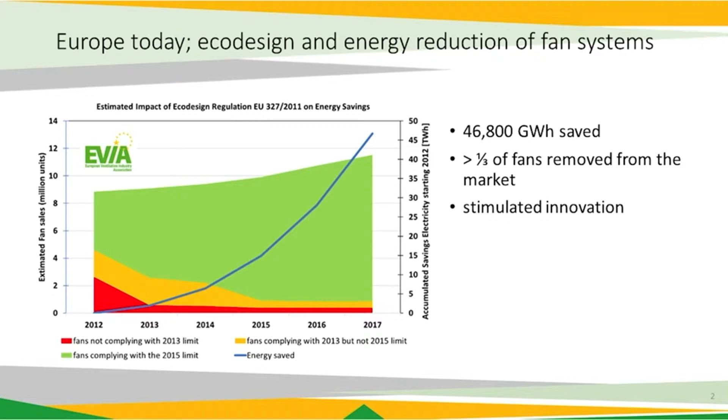Today we have an eco-design regulation in Europe that's very effective. It was published in 2011 and sets minimum energy efficiency requirements for fans between 125 watts and 500 kilowatts. It set a minimum limit in 2013 and 2015, which removed about a third of the least efficient fans from the market. It stimulated innovation, and we estimate 46,800 gigawatt hours of energy has been saved between 2012 and 2017.

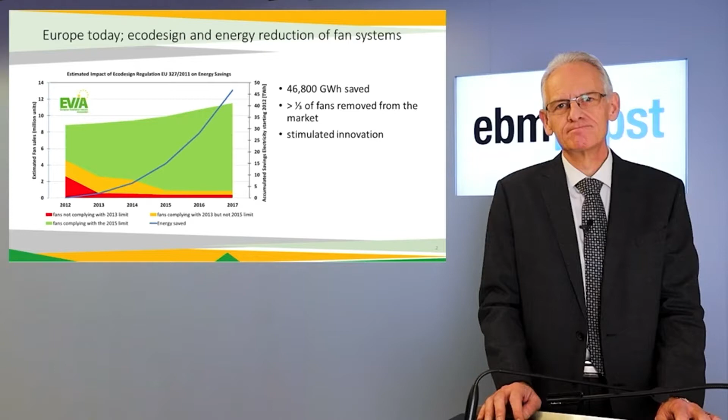So what's the problem? There's pressure for change from a variety of stakeholders. First, the consultant acting on behalf of the European Commission, during his review of the existing regulation, was critical that we haven't developed the underlying metric of that regulation. And it's a fair criticism. Then we see in IEC standards, they ask the fan industry through ISO TC 117 to develop an energy efficiency metric.

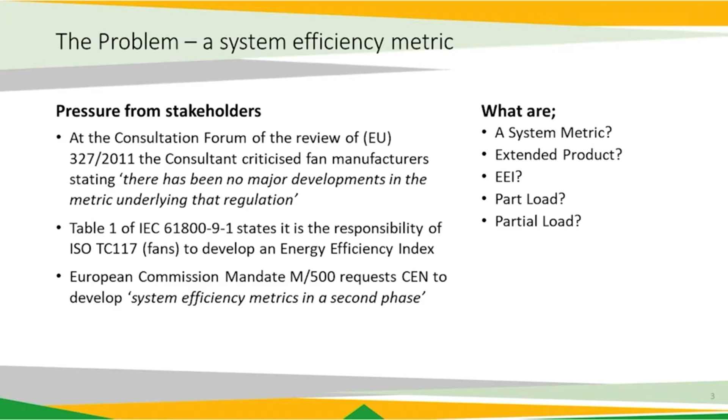We don't think an energy efficiency index is appropriate. Then we have a request from the European Commission through a mandate for standardization. The first phase is complete, and a standard to support the regulation should be published shortly. The second phase asks for a system efficiency metric. The problem is we're not sure what that is.

There's not a clear definition. We see it gets mixed up with the term extended product. We see there's a request for an energy efficiency index, and that talks about part load, but we can't find a definition of part load or partial load.

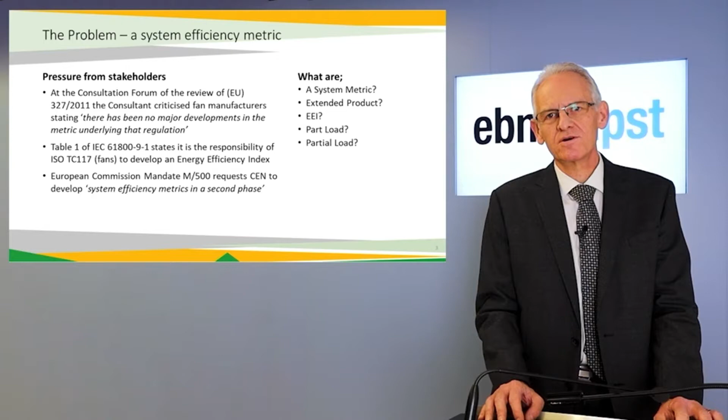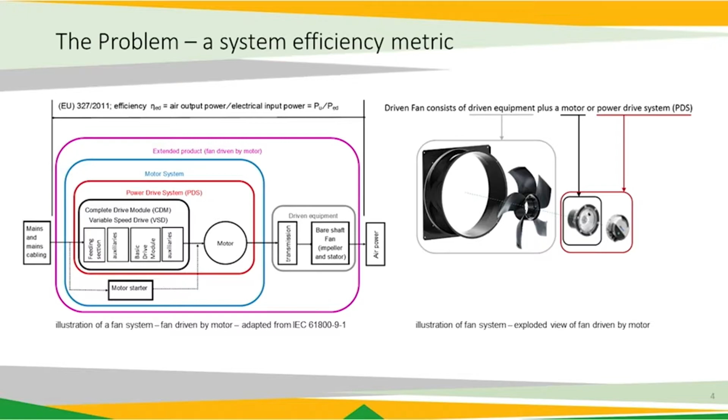What we do know is that the existing regulation is for a system—a fan system. It looks at the electrical power input and the air power output, and the system consists of the driven equipment, impeller and stator, and of the drive, the electric motor, and the variable speed drive.

Let's look at the term extended product. That is clearly defined as driven equipment together with its connected motor system. A fan system is an extended product, and we call it a driven fan, consisting of an impeller, a stator and a motor, and we're clear on that.

IEC 119, I believe, confuses slightly the term system approach and extended product approach. For me, it's clear a system approach within that standard describes a cascading effect from the product through to a larger product, through to the final system. Let's take the example of the fan.

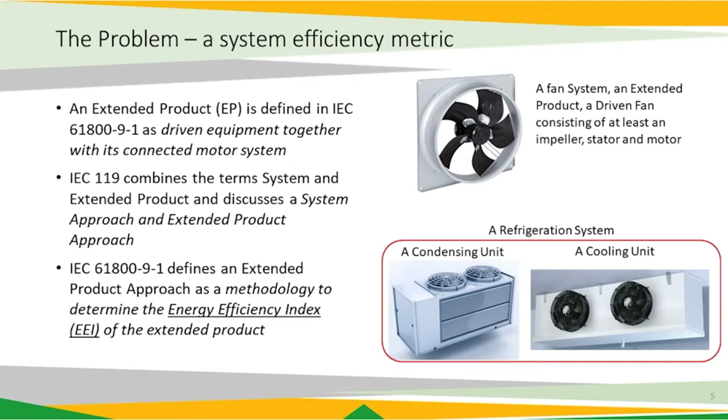We have the fan system consisting of a stator, impeller and motor, and that can be used in a number of different other systems. For example, a condensing unit, which consists of a fan, a coil and a compressor. Or it could be used in a cooling unit, consisting of fans, coils and expansion valves. Those two systems can come together into yet another system, a refrigeration system. So we have this cascade from what I would see as a component through to the final system. And of course, that system goes into other systems, for example, the supermarket.

What I don't understand is why the IEC standard says that the extended product, which is mixed up as a system, has to be an energy efficiency index. It doesn't fit for us, and I can't see it fitting for other systems through the cascade.

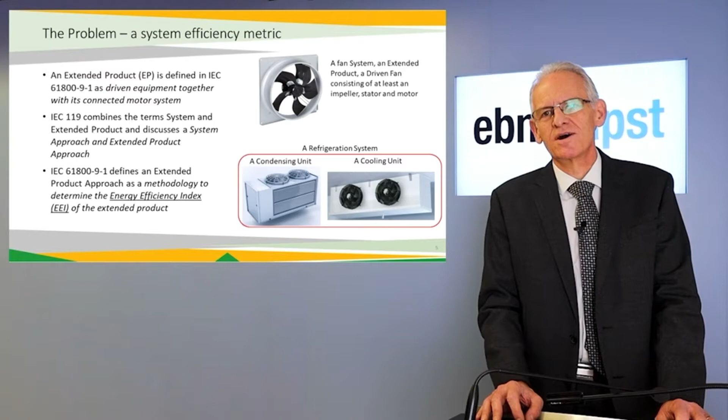Let's look at this energy efficiency index. It's defined in a European pump standard as the average input power compared to reference power, and that average input power is defined as the weighted input over a load profile.

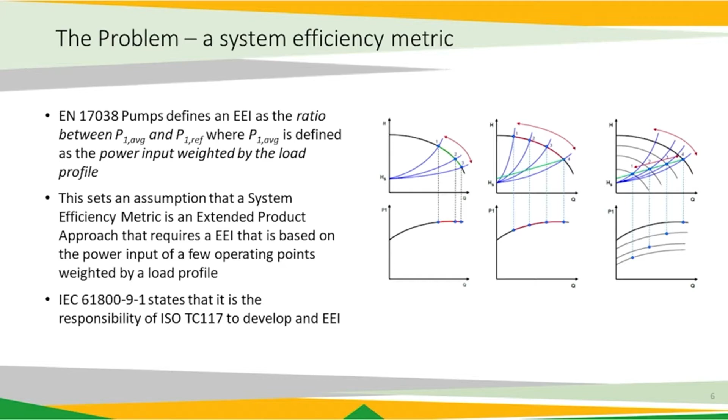This sets an assumption that a system efficiency metric is an extended product approach requiring an EEI based on power input of a few operating points. The standard states that the fan industry should develop one.

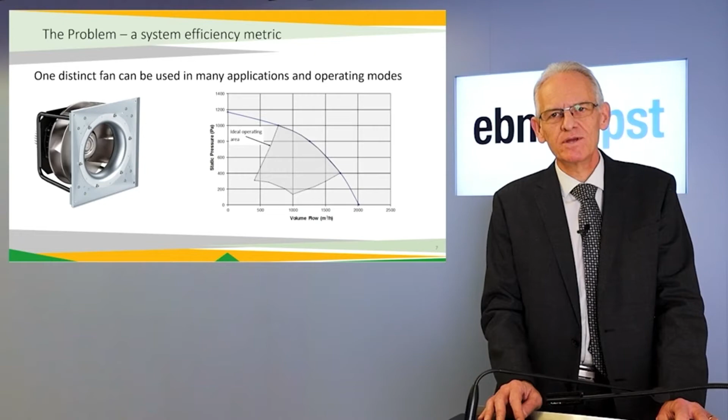Let's look at the example of one fan, a unique fan. It's got its own part number, is published in a catalogue, and is used by many different customers in many different applications. We, as a fan manufacturer, publish a graph. The blue line is the performance at full speed, sometimes called inherent speed. The grey area underneath indicates the optimum operating range for that fan.

One customer may use it at the fixed full speed, and the duty point will modulate depending on how the load on their system varies - the volume and the pressure will change.

Another customer may wish to use the speed control function and increase or decrease the rotational speed of the impeller to change the volume based on the system resistance.

Another customer may wish to maintain a constant volume, changing the speed of the impeller as the pressure in their system changes to maintain that constant volume.

Alternatively, others use it to maintain a constant pressure, and as the pressure in the system changes, the fan speed changes to maintain that pressure, with the consequence of changing volume. How can 4 duty points fully describe the full characteristic of this fan?

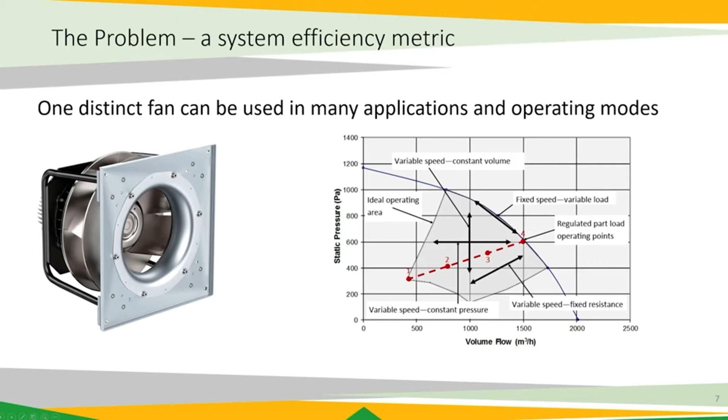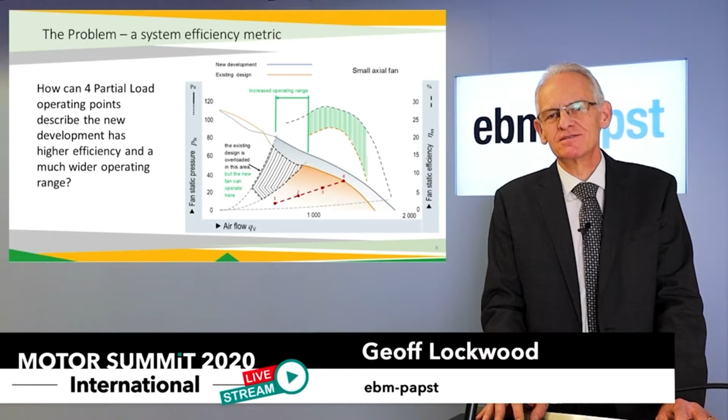The blue line with the blue area is a new fan, brought out to replace the old one. It can fit in the same space envelope. It produces more volume flow, higher pressure, and consumes less energy. It is more efficient, but more importantly, it has a much wider operating range.

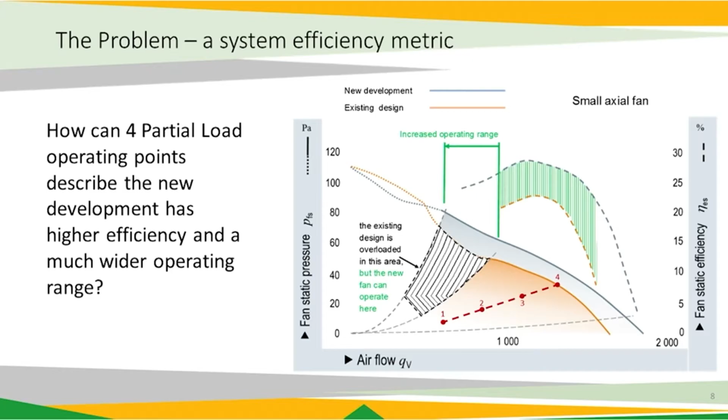It can be used in a zone where the old fan can't. It is a much more flexible fan, providing a bigger characteristic, better choice, better informed decisions. How can 4 operating points describe the increased pressure, increased volume, and improved energy efficiency?

So what is the solution? Well, first of all, we want to say that an energy efficiency index is inappropriate for us. We can see that we would be developing fans around those 4 points that, yes, we can tick the box and say they're energy efficient, but they're not of any benefit to our customers.

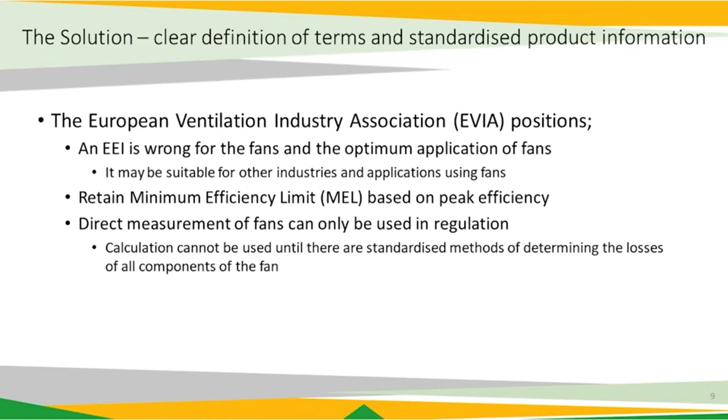We want to retain what works - the minimum efficiency limit based on peak efficiency - and remove the least efficient fans. We also want to point out that we should only use direct measurement in a regulation. That's a further discussion for another day.

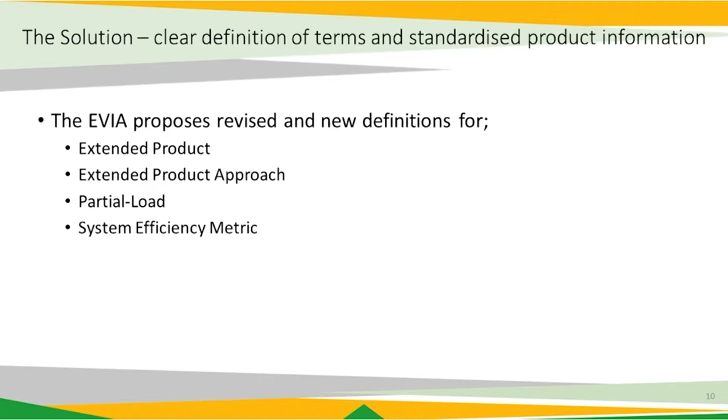We wish to see revised definitions, and we are proposing revised definitions for extended product and extended product approach. We need definitions for part load and system efficiency metric, and we have proposed those definitions.

The solution is product information for better informed decisions, and the good news is it's here already. What's missing is a standardized approach.

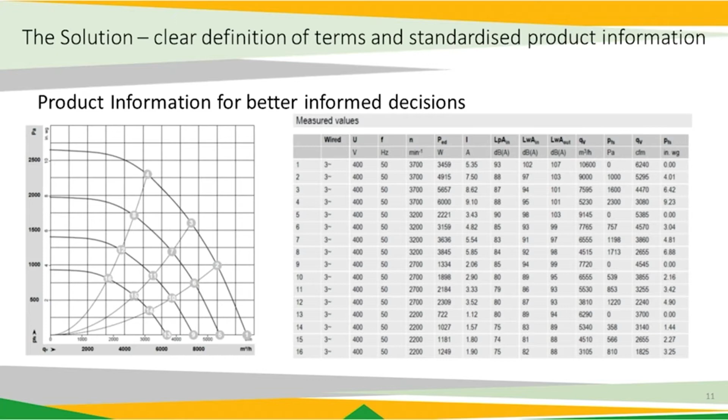Today, reputable manufacturers provide a lot of data about their products. The graph there shows the inherent speed and fan curves at a number of different reduced speeds, and the table shows the data at various points on those curves. That data is not just efficiency - it states the power input, the current, the efficiency, and other impacts on the environment, like the noise it produces.

That data is collected into software programs, selection programs, where our customers can compare fans and look for the right one for their application. This is an example, and it's highlighting the best in class.

Not surprisingly, the one at the top is the most efficient. It's the lowest power input, the best energy efficiency index, and the best specific fan power.

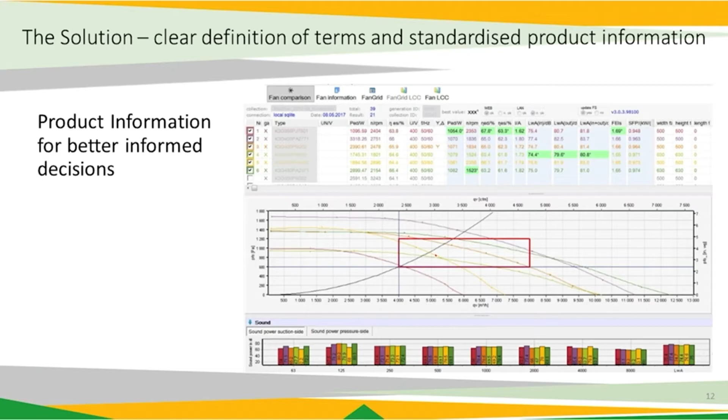But the fourth one down is the quietest. So do you want the least power, or do you want the lowest noise? Or perhaps you want a combination of the two. This gives the user the ability to find the right thing for their application.

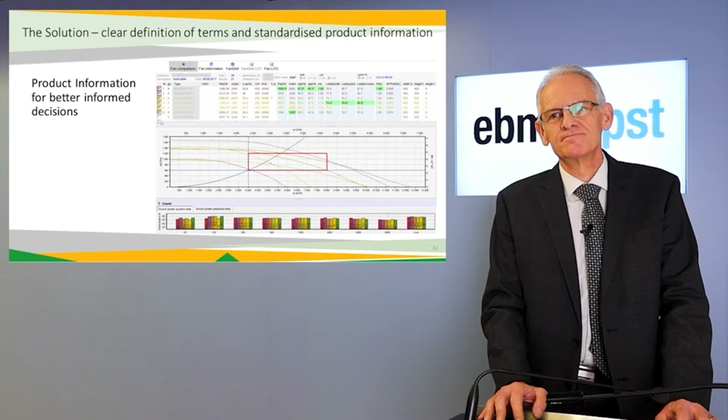So what we're saying as an industry is that we need a standardized approach to provide that product information. For series produced fans that are not speed controlled, we need to publish the inherent speed and a number of data points, described in our standard ISO 5801.

Market surveillance can then take the fan off the market and check any one of those data points, or all of them. For a fan with an integral drive, or designed to be used with a variable speed drive, then...

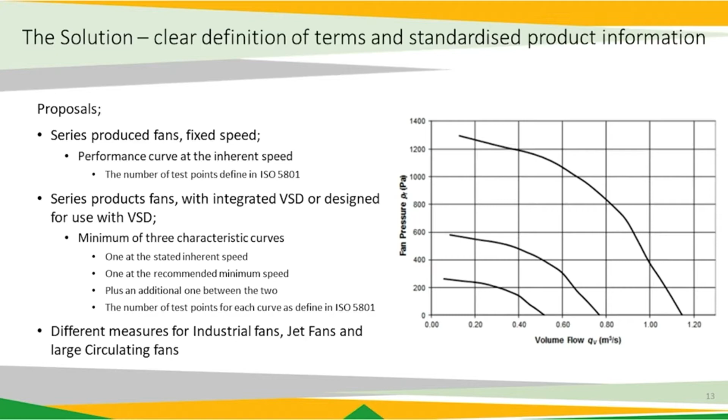We're proposing our data should be at least the inherent speed, the minimum recommended speed, and one speed in between the two. That way, our clients can interpolate between those fan curves and find the power input, the specific fan power, the fan energy index, the efficiency, whatever they wish, and the acoustic performance.

Market surveillance can take this product off the market, and they can check our stated points on those curves to make sure we're not cheating. So it provides a method for market surveillance, and it provides information to make better informed decisions.

There's some other things we need to do: industrial fans, jet fans, and circulating fans. We're working on them, but there'll be a similar approach.

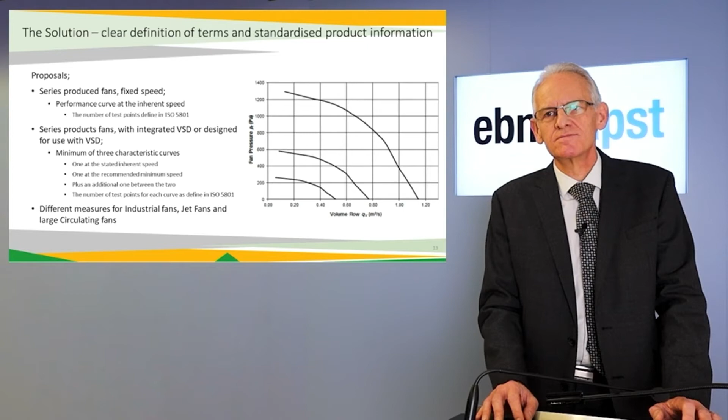So in conclusion, keep what works. Regulation 327 is for a fan system. It's transformed the market, it's removed the least efficient fans, it's stimulating innovation, and most importantly, it's reduced energy consumption.

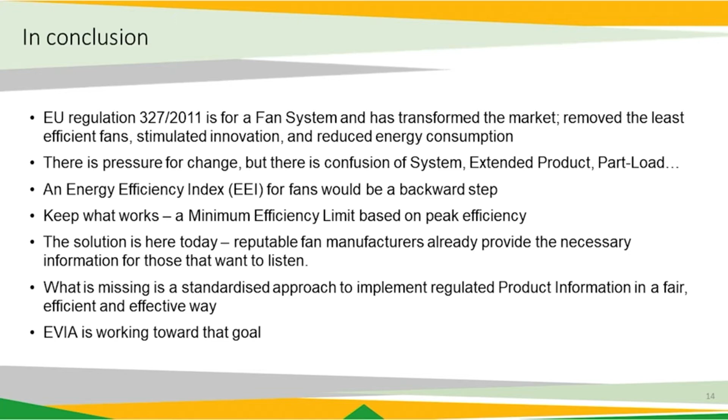There is a pressure for change, but it's confused. What is a system efficiency? What's part load? And there's a pressure to do something that's not right for the industry. Energy efficiency index is a backward step for fans.

Let's keep what works. Let's keep a minimum energy efficiency limit based on peak efficiency and add to it better product information, something we already do. What's missing is a standardized approach, and that's what EVIA is working on.

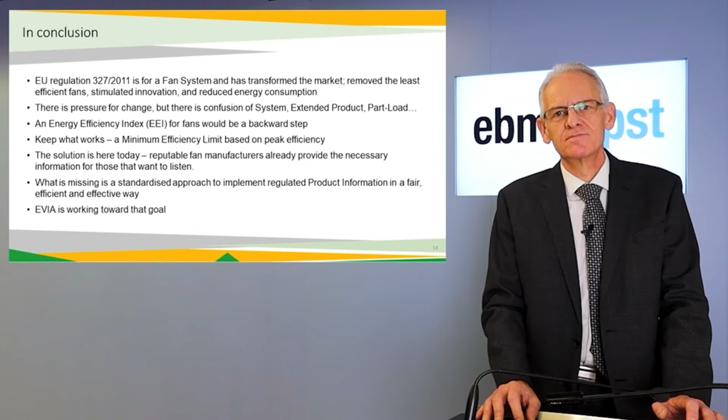We have published our problem statement. You'll find it on our website, and it gives far more information than I've just described today. We're just about to publish our proposal, and we're in discussions with the European Commission's policy officer suggesting how product information can be standardized.